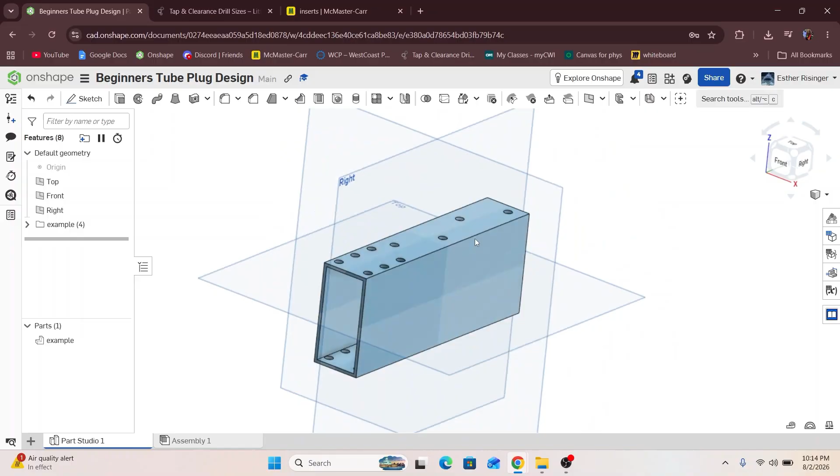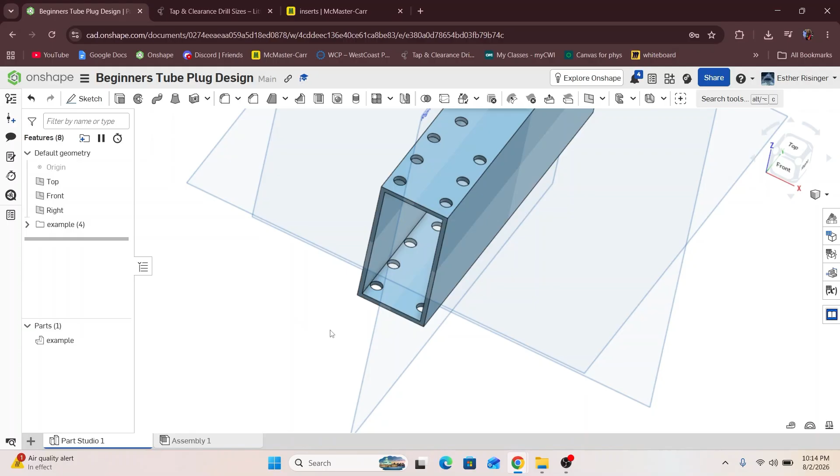Looking at this tube plug, you'll notice there are a couple different types of hole patterns on it. All of the tube holes I'm using today are 8-32 hole sizes. In the tubes here, these holes are basically tangent with the inside wall of the tube. This is a situation where if a part mounting to the tube with these holes doesn't have a lot of strain on it, you wouldn't need a tube plug, because the wall of the tube being so close aids in bolt support so there isn't as much likelihood to buckle or bend the tube.

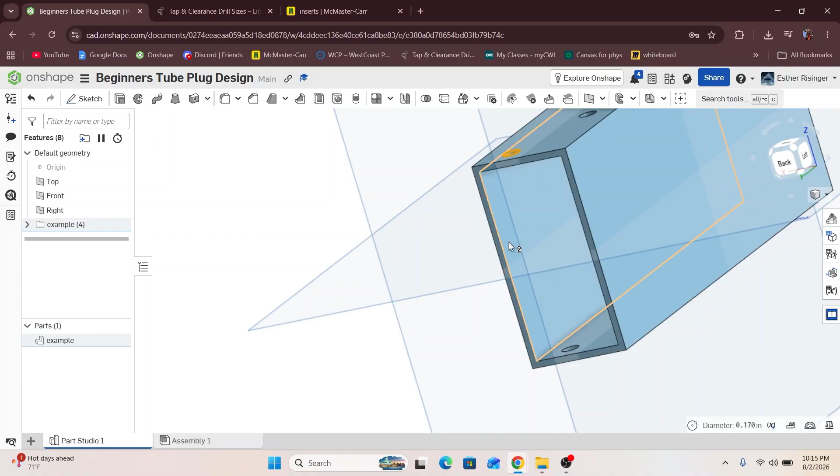But here on this side of the tube, where I have holes that are a quarter inch off the edge, they are not fully supported by the wall being so close. This is a situation where you would want to use a tube plug.

The tube I'm using today is a 1 inch by 2 inch tube, with a 1/16 wall thickness. So to do the plug I'm going to teach you how to design, I'll start by sketching on the top face of the tube.

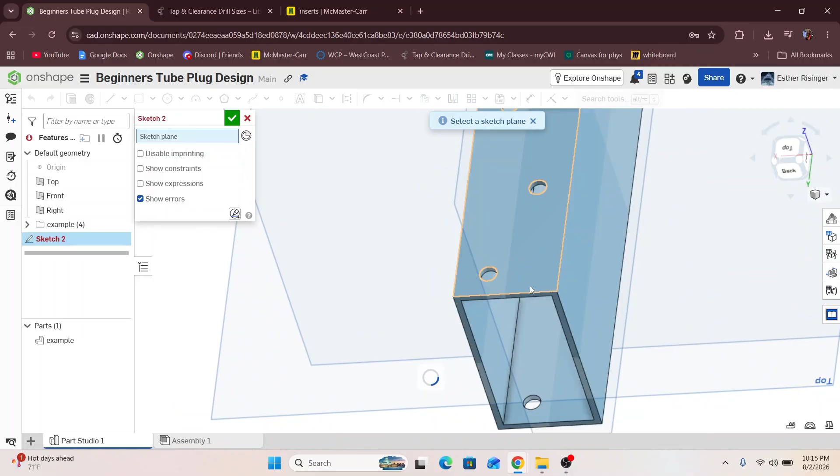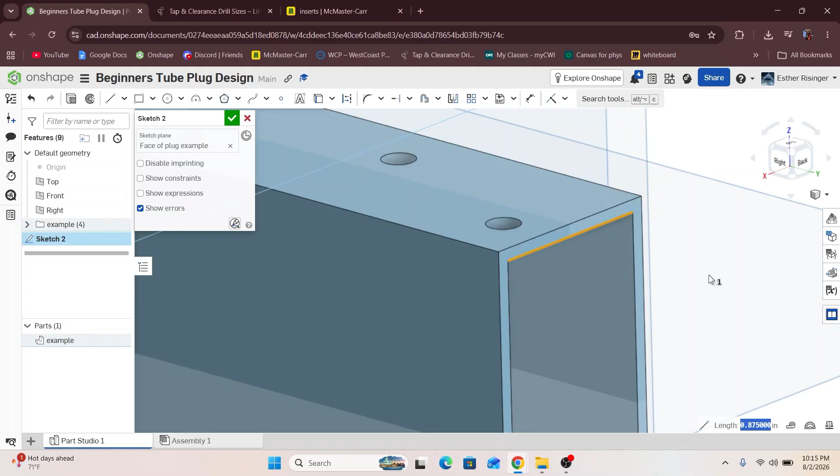I don't want to use these outside lines—it may seem obvious to many of you, but for those without much 3D modeling experience, the tube plug goes into this section here. If I used the length of this part to make my plug, it wouldn't actually fit in the 7/8 size of the inside of the tube.

So I'm going to start by using these inner walls as construction lines so I can know the bounds in which my plug has to fit.

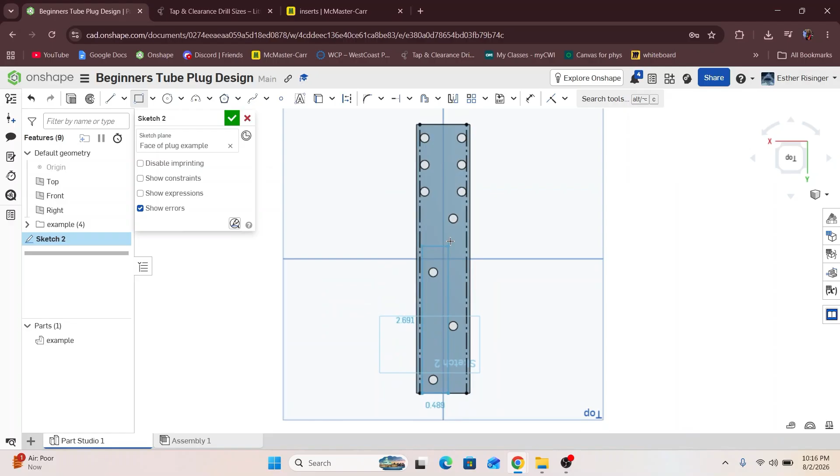Next I'm going to create a rectangle, and I want to capture this hole, this hole, this hole, and this hole, so I'll move my rectangle to be right above the last hole I want to capture. A good rule of thumb for material past the bolt is to use the same diameter as your bolt hole until you reach the outside of the plug or piece of material.

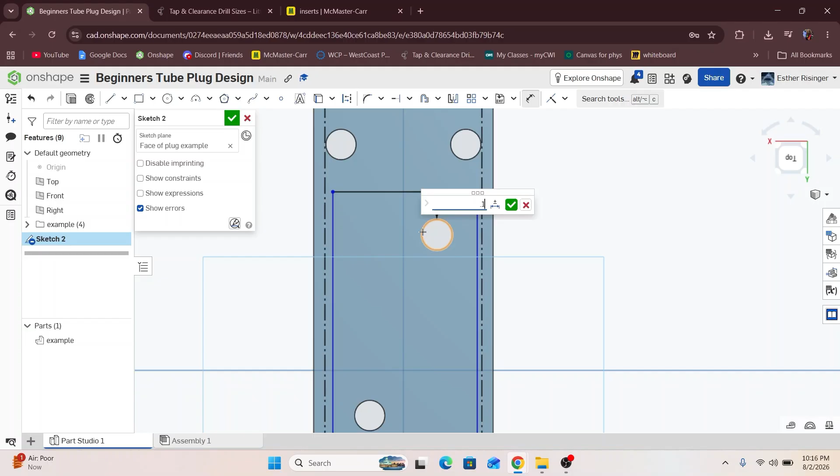So I'm going to create a dimension—if this hole is 0.1695, and I want it to be that same diameter away, I'll just make it 0.17. No need for it to be super exact.

Now my plug has a good length set, but the sides are way off, and I can move them wherever I want, so I need to define those.

If I just made the rectangle the exact length and went to print it on my 3D printer—most 3D printers have a tolerance that prints either 15 thousandths oversize, down to 10 thousandths or 5 thousandths, and I've never seen one that prints exactly to size.

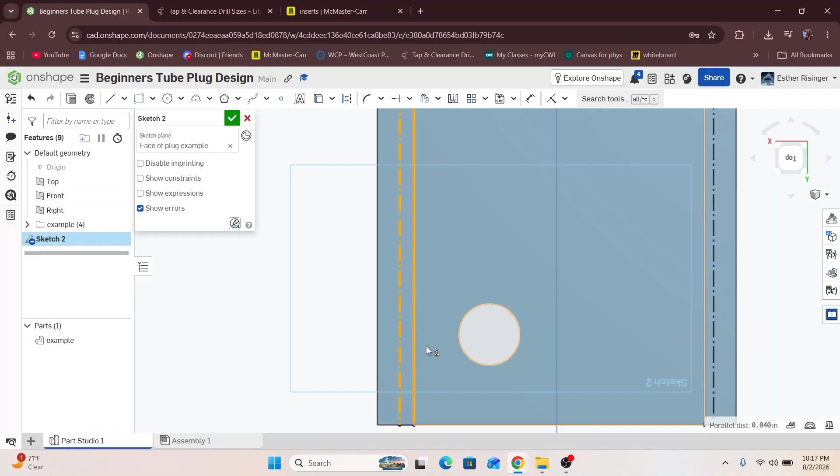So we'll want to make this plug slightly undersized—I'm going to add roughly 5 thousandths of clearance per side from the inside of the wall. Once you finish working on your plug, you'll want to print it and make sure it fits in your tube just right.

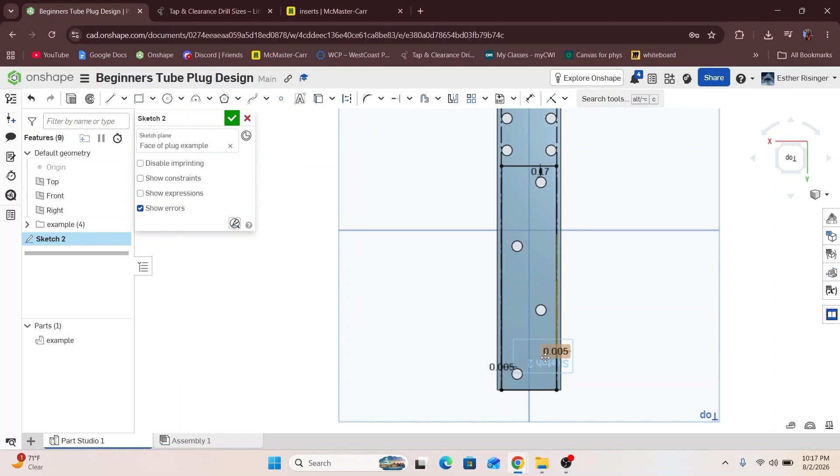Now that I have the rectangle of my plug dimensioned, I'm going to go back and use all of the holes that I want to put in my plug as construction lines.

When you're first approaching a plug design task, you'll want to observe all of the constraints that are going to be placed on your plug. So here I can look at these holes on top and think, oh, perfect.

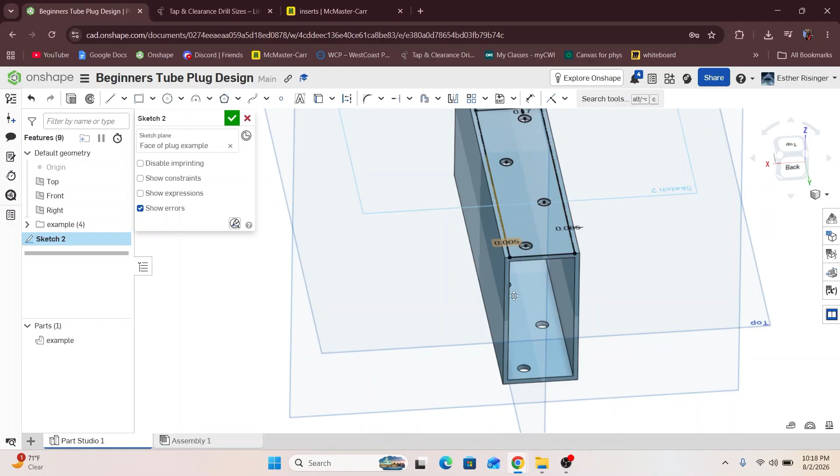I just have to have holes for the first half inch into my plug. But when I look around at the rest of the system, I'm going to realize that the holes actually go all the way through the plug.

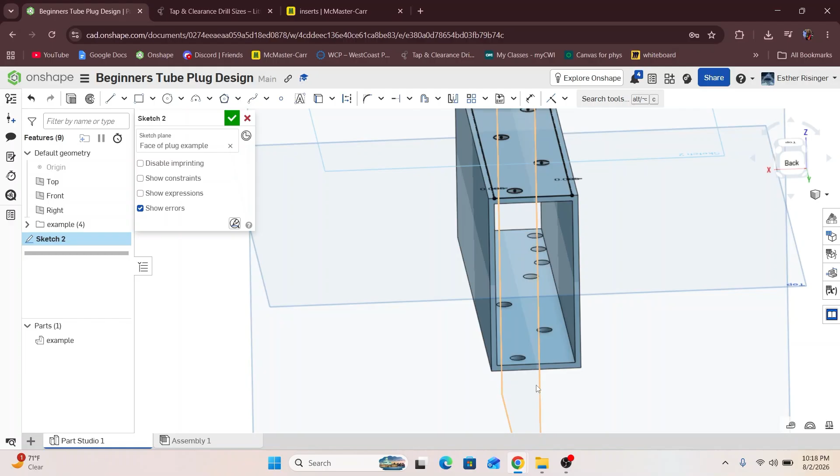Since this is an 8-32 clearance and the top is an 8-32 clearance, I'll either have to look at whatever's bolting onto here and see if the plug needs to be tapped on both ends so a bolt can go in from each side, or if the mounting part is tapped on one side and clearance on the other, then I'll know I need to run a bolt all the way through the system so the plug ends up fully clearanced.

Now, to keep things simple for today, I'm just going to pretend that my bolt's going to go all the way through the tube. So my hole in my plug is going to be the exact same size as it is in the tube.

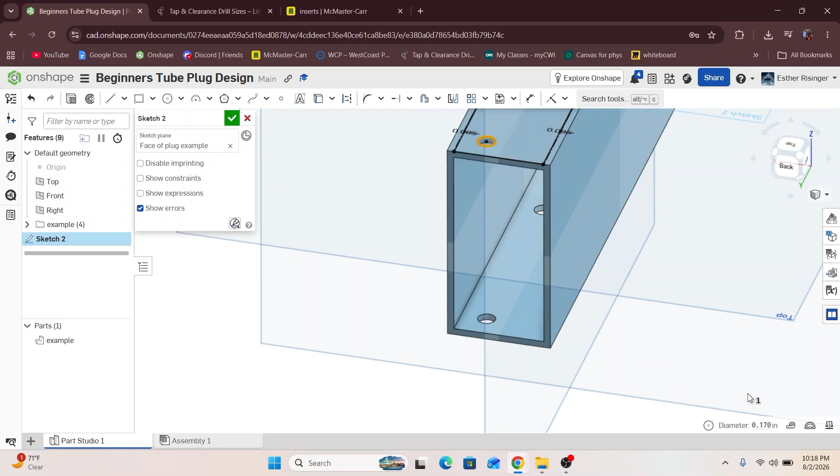Alright, and here I have the general sketch for everything that my plug needs to function. Now I'm going to start by making an offset here, and I'll offset it by the thickness of the wall of the tube, plus those 5 thousandths that I wanted my plug to have clearance from the wall.

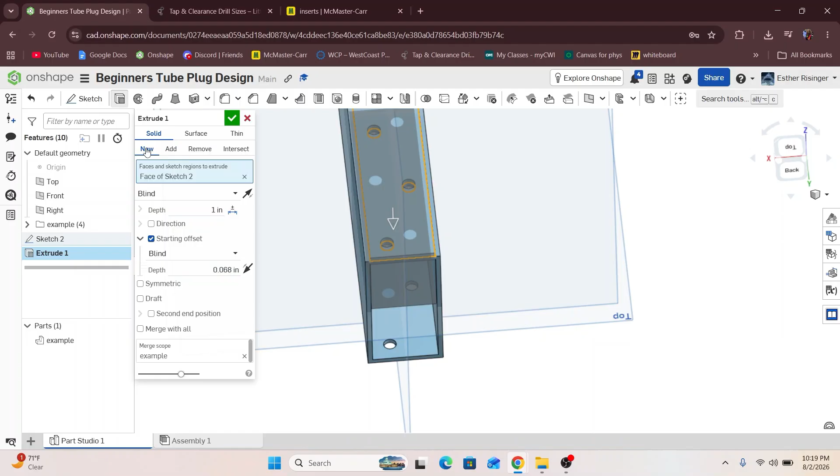If I zoom in here, you'll see it offset in the wrong direction. So I'm just going to click this and it will switch to the opposite direction of the extrude or the starting offset. Now when we look at it, we have that 5 thousandths.

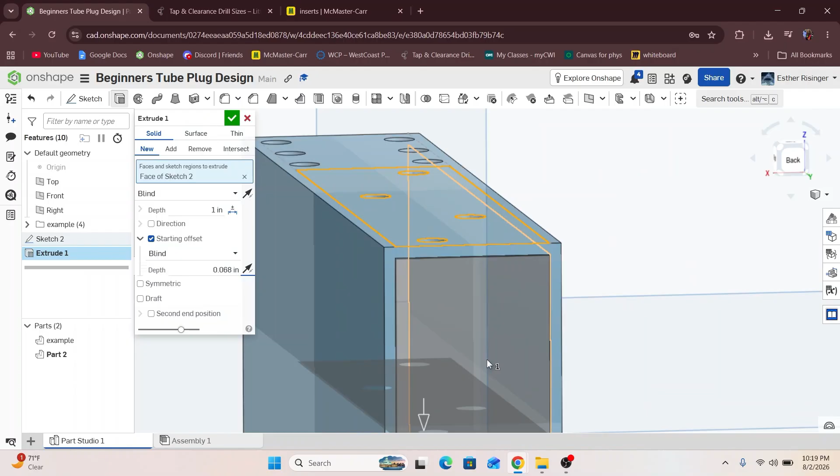Now the total distance we're going to extrude it is going to be the height of our tube, inside to inside wall, minus the total clearance you want. So I'm going to subtract 10 thousandths. And here we'll see we have 5 thousandths per side of clearance.

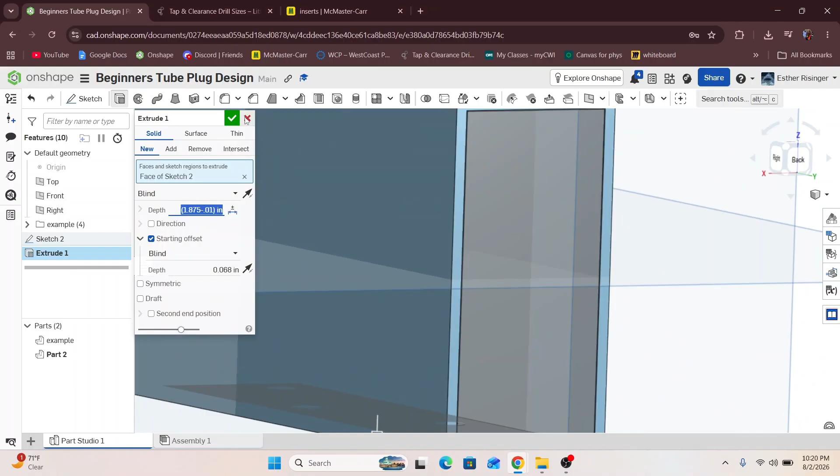And there you go. That is the very bare minimum that you need for a tube plug.

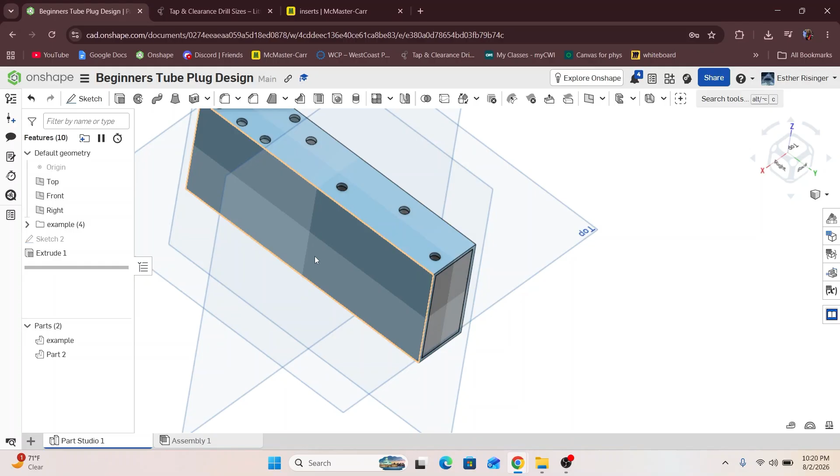Now on an FRC team, generally tube plugs are really heavy, and you're always fighting weight to optimize performance on your robot, but you don't want to throw away 15 pounds into printed plastic in your tubes. So here we're going to lighten this plug.

I'm going to start by making a sketch on that same top face. And I'm going to go into all of my circles and make construction circles, all of the same size.

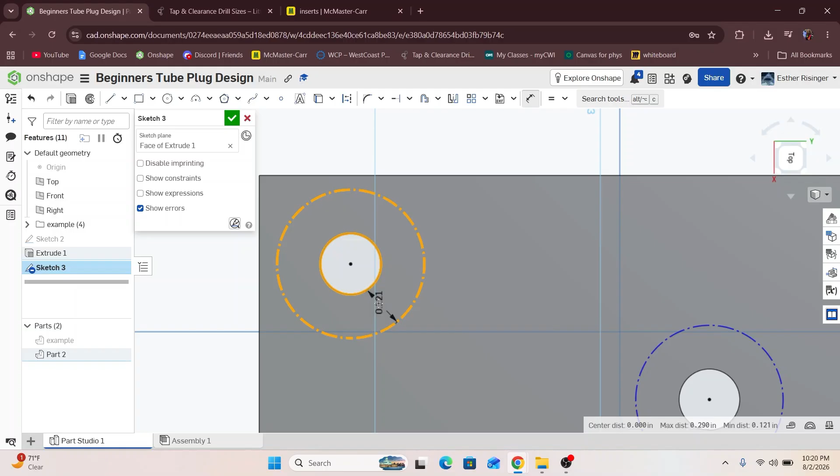Now, I don't want my holes to have this much printed plastic around the outside of them -- that's not very supported. So I'm going to add at least 1/8 from the outside of my hole to the outside of the construction line circles that I made.

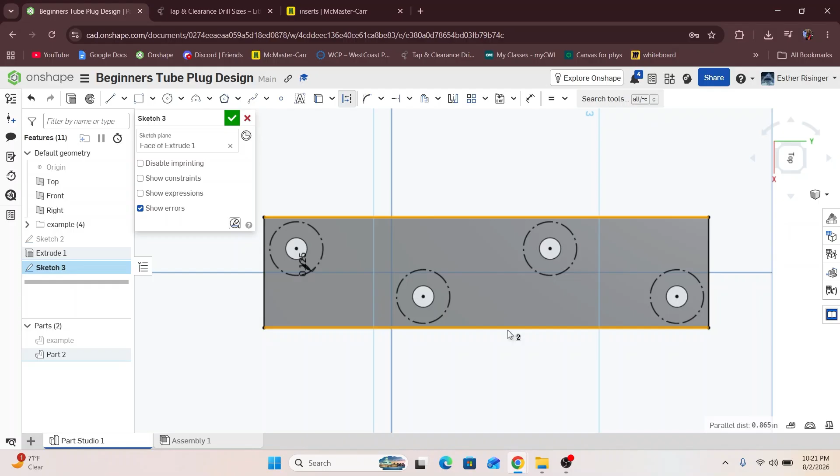Now, generally, when I'm working with a plug, I like to have the front and back of it be flat all the way. So I'm going to use those lines too, and make the other two lines that I know need to stay as construction lines. Now I can hide my plug and work on the rest of my lightening pattern.

When I start lightening a plug, I first start by drawing a line in between all of the circles. Drawing the line in between them just makes the plug stronger, because I will eventually have a rib of material here to support the plug.

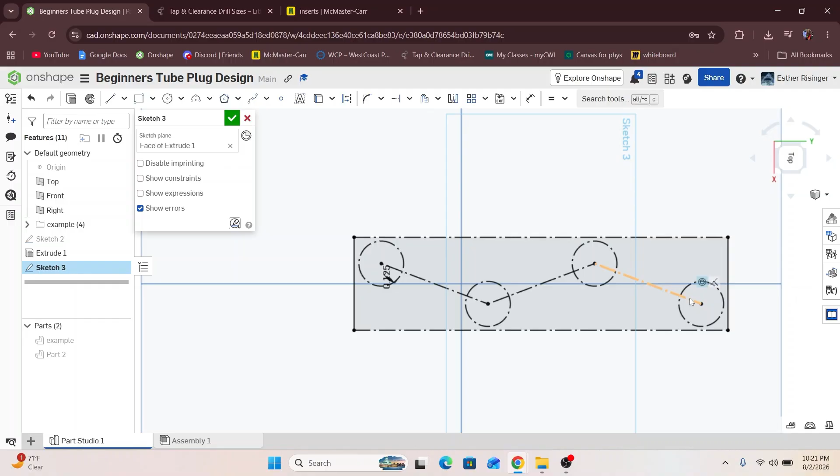Now what I want to do is connect all of the points that are going to be having stress in them, in the most realistic and strong way. So I'm going to start by making lines that are parallel to the center lines so that I can have a solid rib of material around where my stresses are going to be.

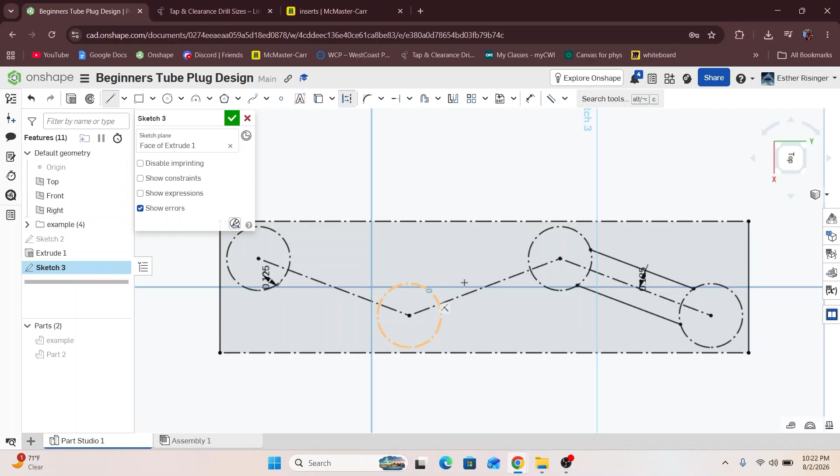And similarly, I'll do that for the rest of these. Alright, so I've completed the ribs between all 4 circles. But now you'll notice, why did I make this circle out of construction line when I could just make it a solid and extrude everything around it, and it would be fine?

What I've noticed in my experience is when I make this circle a solid line and go to change my plug at all, sometimes with complex lightening patterns, when you update the extrude, the whole thing will explode because it can't remember what exactly is confined to the inside of your solid part. So I'll start with a construction line and then create a solid line just around the perimeter of my circles. But I don't like that for this situation.

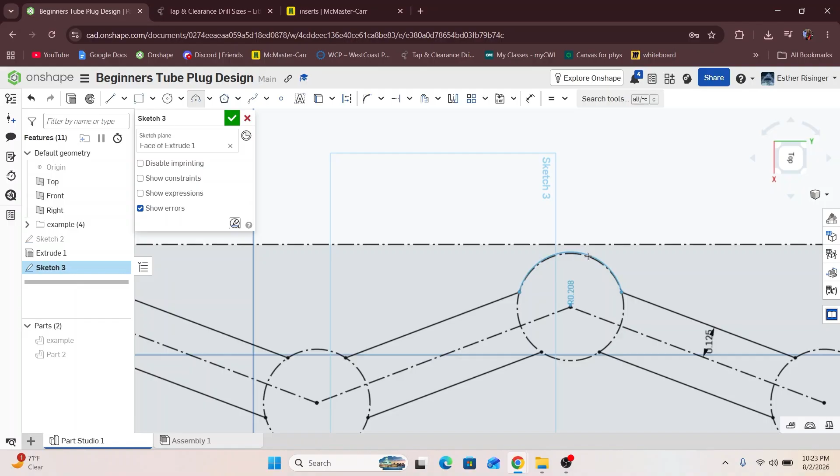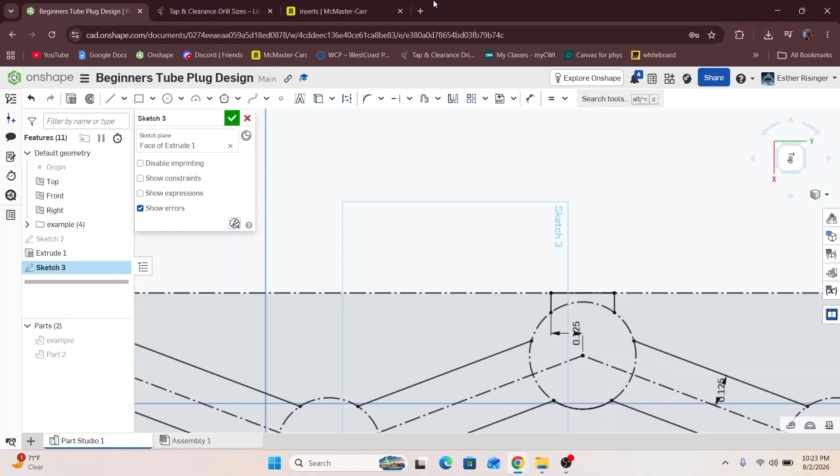I would do that here on the inside. But anywhere where the hole gets close to contacting the outside of my plug, I'm going to create another little arm or leg to go out to the wall of the tube. This is just adding support in your plug so that they are held firmly in the tube.

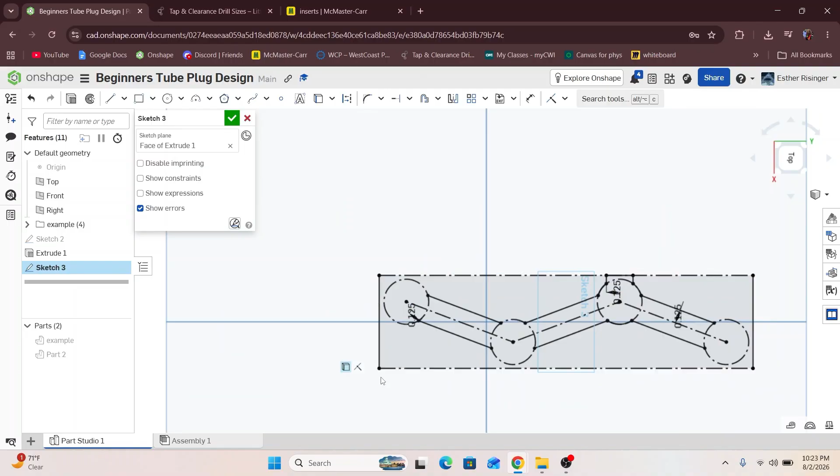And now I just have this remainder section that is a construction line, so I'm going to go back and make that a solid line so the whole thing is defined here. As I was saying, I want the front end and the back end of my plug to be fully flat. So instead of just making a little arm that goes out here, I'm going to draw a line here and bring it down, and then make a fillet in between these 2 edges.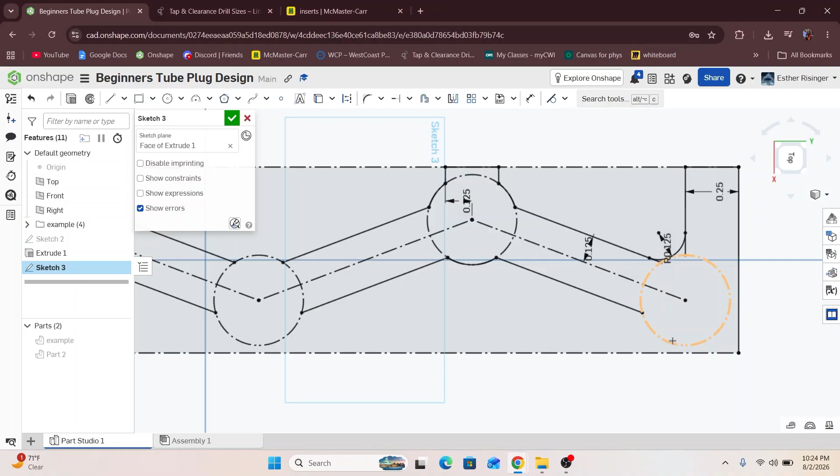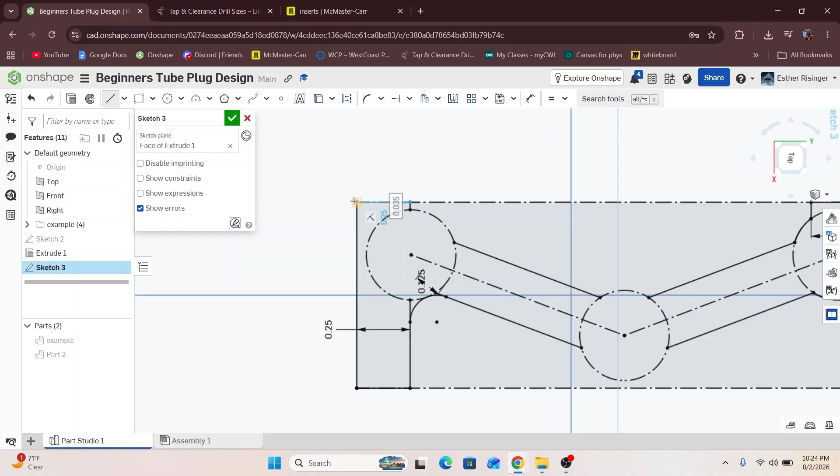Make that fillet tangent, and then make this a good thickness - I like a 1/4 inch thick. Down here I would just add another little line segment. Similarly back here, I'm going to connect these, add a generous fillet here, and draw the line back here off to the tube wall. And then I'm going to connect these.

And there you have it. Now, the whole purpose of creating this sketch here and defining the shape of my plug is so that I can find everything that is not necessary for the strength of this plug. And that's how I decide what I'm going to lighten.

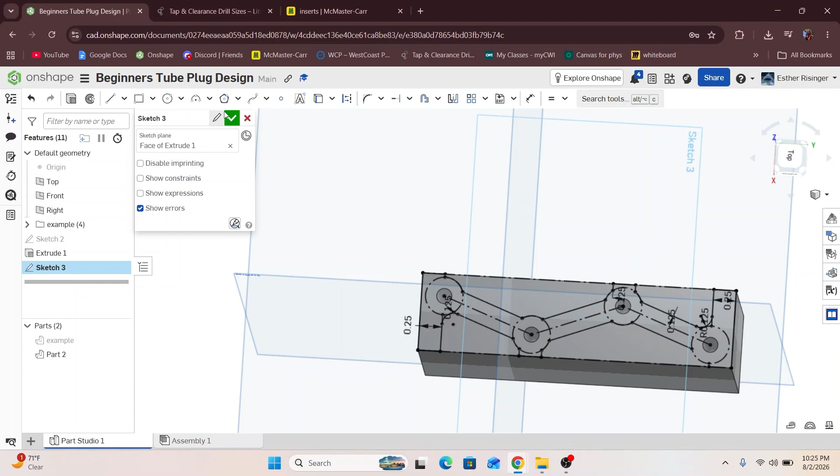So now I'll create an extrude and go back into all of the sections that I created. And it looked like in my extrude it wouldn't let me select this section, so I must have an error. Oh, would you look at that - I forgot to make this a solid line.

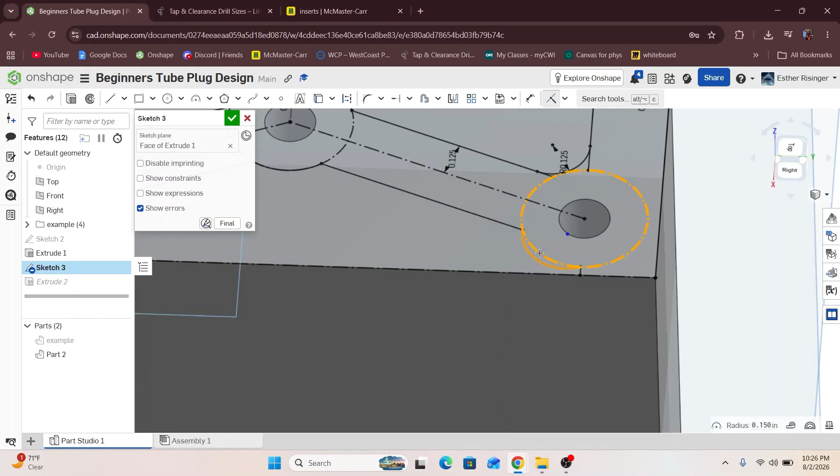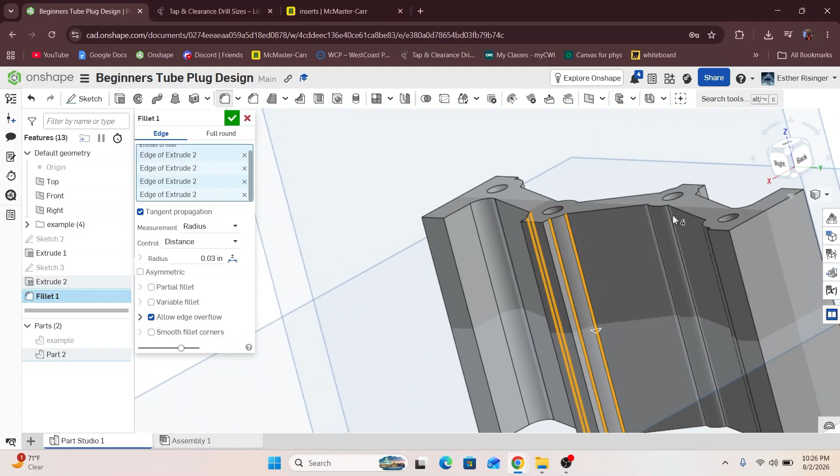Now I extruded everything that I need to make my plug work. But in order to make this thing a little bit stronger, I'm just going to go around and polish every single round edge on the inside of my plug by adding a nice fillet, just to make it smoother, and in my mind it adds a little bit more strength than it had previously.

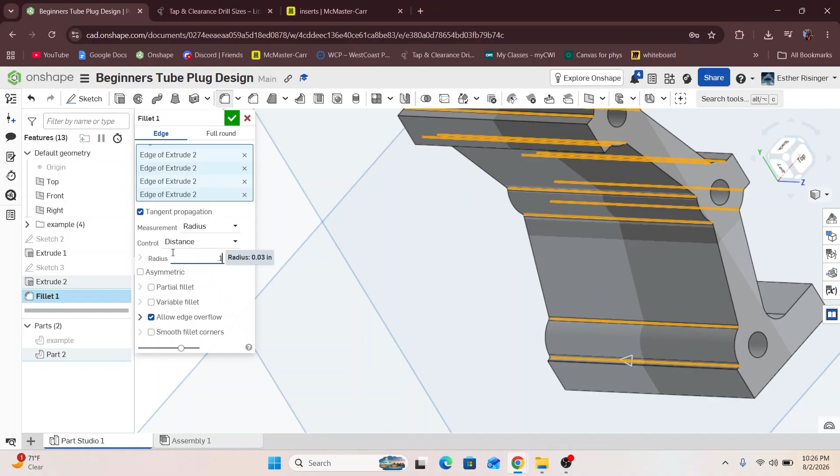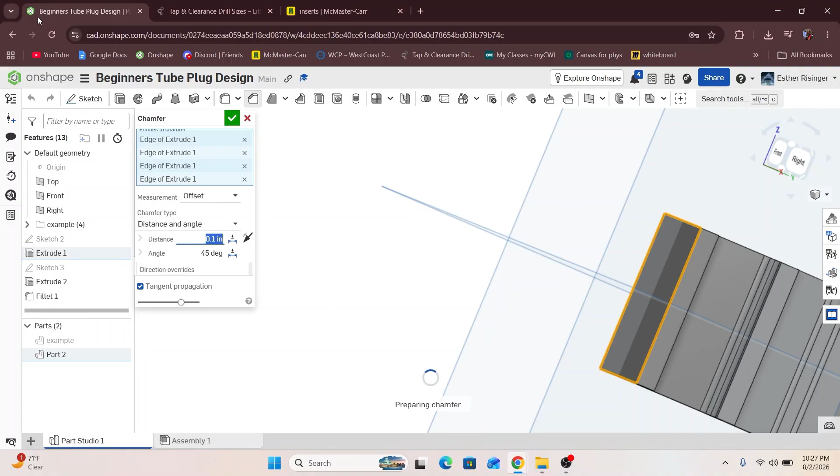And I'd maybe make that fillet 0.1. Alright, now when you're putting a plug into a tube, I like to make the front end, or the end that goes into the tube first, have a nice chamfer on it, just so it can fit in there nicely. So I'm just going to go around this leading edge and add a 0.1 inch chamfer all the way around it.

And just like that, you've created a nice tube plug that you can push into this tube, and you can support all the bolts that go through here. Hopefully this gave you a little perspective on how to design a tube plug for an FRC team, if you're a new student or someone's asking you to design one. This is kind of the bare minimum. A lot of times you'll get uber complicated plugs, or the tube will have holes on both sides and be multi-axis, but this is a great way to get yourself understanding how to create a plug and how to lighten it and the process behind that.